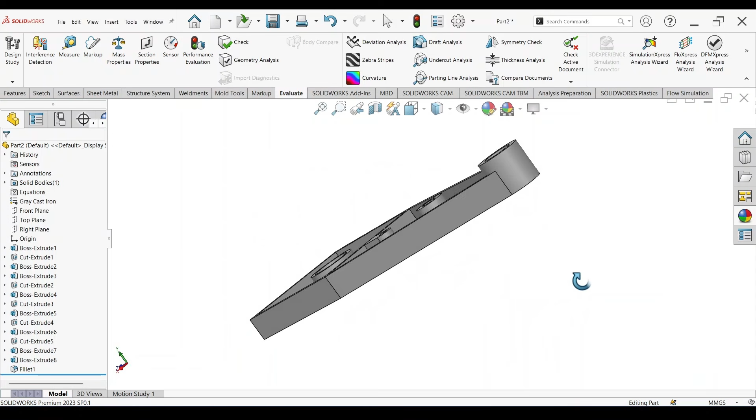In designing this part within SolidWorks, we're going to be using many SolidWorks features, namely the extrude boss base feature and extrude cut feature. But to create these ribs here, you have two options: you can either use the extrude boss base tool, following the sketches you create, or you could use the rib tool. This is left up to you.

Here we see the schematic drawing for exercise number 46. All dimensions are in millimeters. We have the top view, the section view, taken along this vertical line represented by the line of symmetry for the component, the y-axis. We also have the isometric view and a trimetric view, two different pictorial views so you can see all the necessary details.

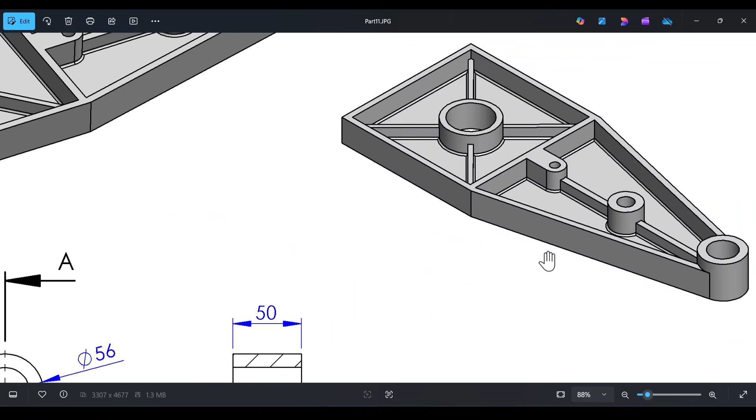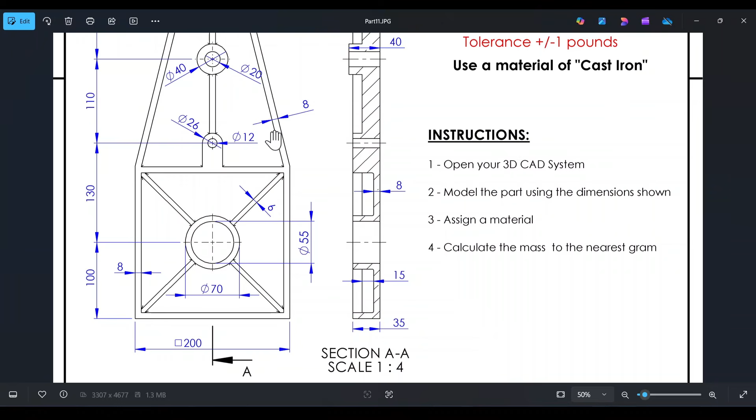If you look at the drawing here, we see a question that reads: what is the mass of this part in grams? We're instructed to use a material of cast iron, or gray cast iron. We have a number of instructions, pretty self-explanatory: you start by modeling the component according to the dimensions shown, assign the material, and then determine the mass of the component.

We have a note here at the bottom that says, unless stated, all fillets have a radius of 2 millimeters. Do we have a fillet here for this component? We do. We see the intersection, the edges between the wall here and the bottom surface, where we have a fillet.

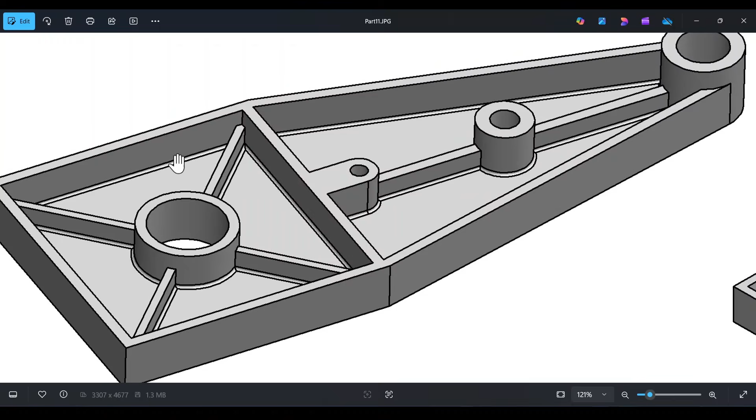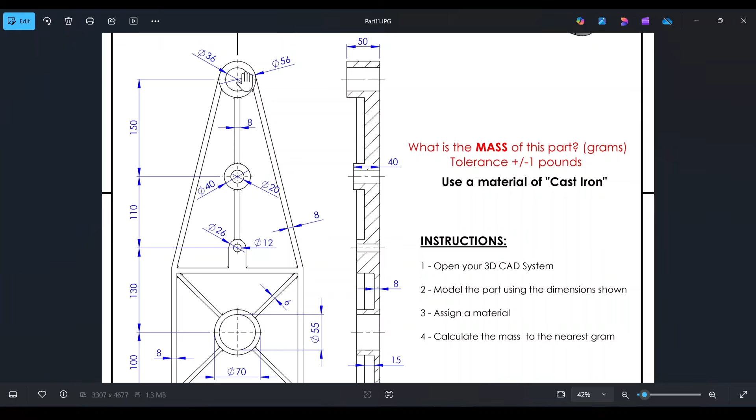Looking at the main features for this component, we see we have a base plate represented by a square region, in addition to a tapered upper arm. We have three bosses: the upper boss, the intermediate boss, and the lower boss, in addition to the diagonal ribs for the lower boss, and a central rib that runs along the center of the component, the line of symmetry. This rib connects the upper boss with the intermediate boss, in addition to this mounting region.

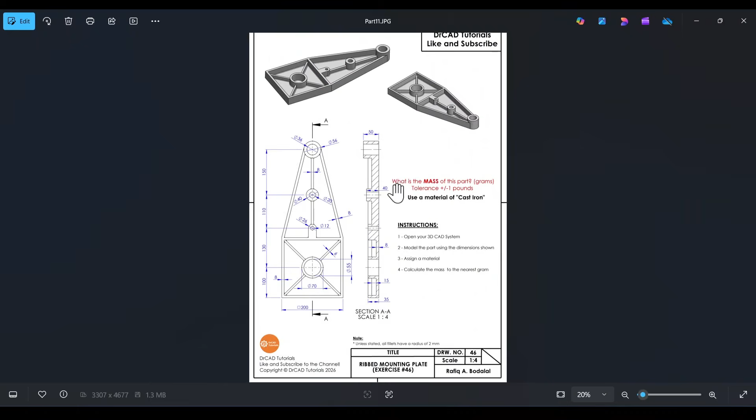Also, if we look closely here, we have a recess, an opening. So this is not a perfect solid, it's actually a pocket. If you're manufacturing this, you'll have to use a milling machine to create these pockets. That's basically all the necessary features for the component. It's a relatively simple practice problem within SolidWorks. With that aside, let's get started with exercise number 46.

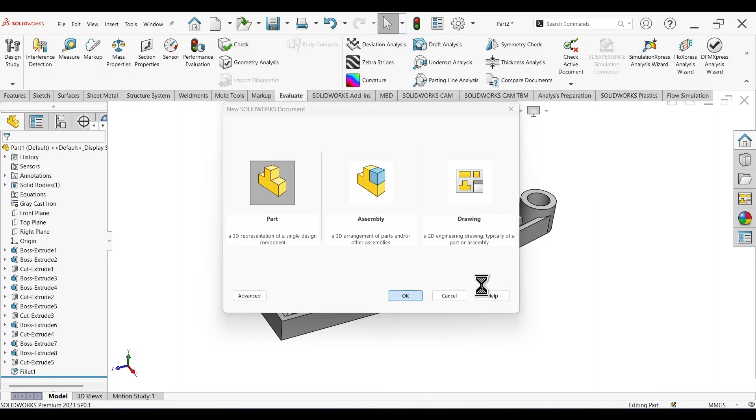Okay, so let's start by creating a new SolidWorks part. Let's set the background to plain white, and let's copy exercise number 46 into SolidWorks. Let's go ahead and make this smaller.

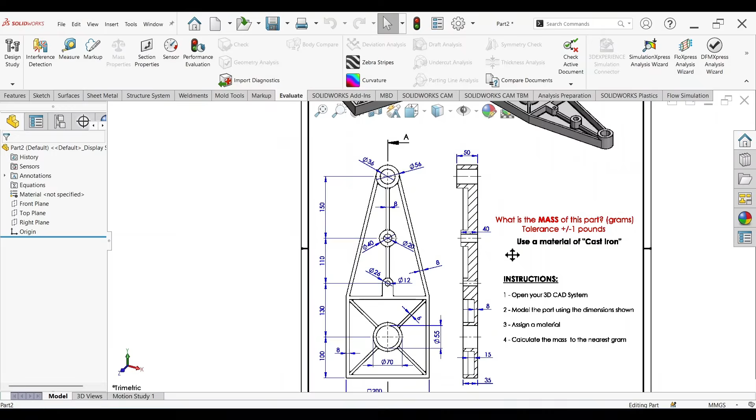As I said previously, we are going to start by creating the 2D sketch represented by the base plate for the component. So let's select the top plane, sketch, drag this to the side, and sketch out this square region. Activate the center rectangle tool, and from the origin, draw a rectangle. Select these two entities and set the relation as equal, and that will create a perfect square.

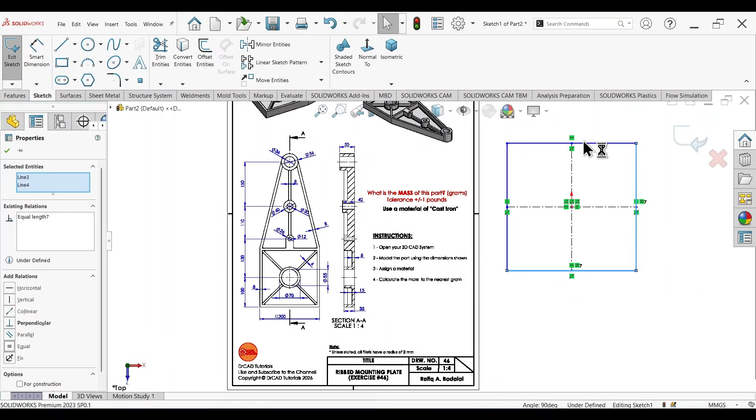Activate the Smart Dimension tool. From the figure we see that this square region has a dimension of 200 millimeters, and this square symbol here represents that the dimension of this side is equal to the dimension of this side - it's a perfect square. So this should be 200 millimeters.

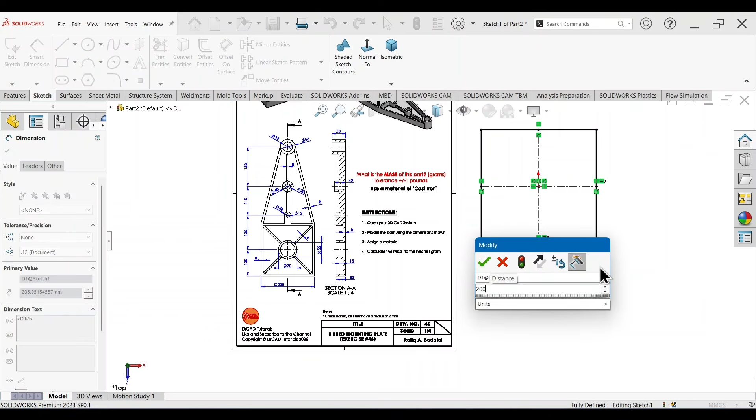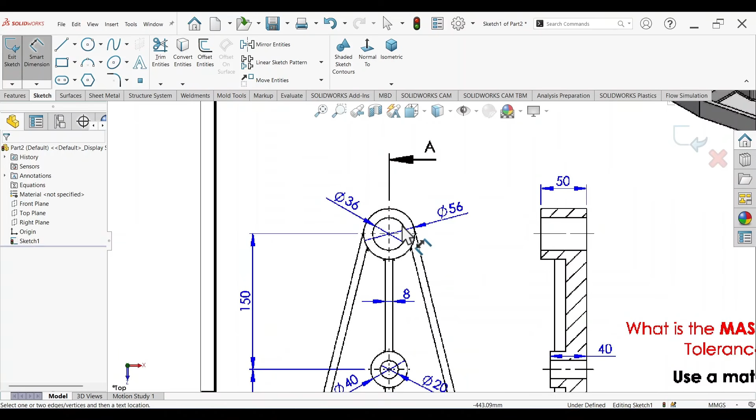Now we're going to sketch the upper arm here, the tapered upper arm for the component. Let's activate the circle tool, and from this point, draw the circle. Activate the Smart Dimension tool, and we can see that the diameter of this larger circular region is 56 millimeters, so this is 56 millimeters.

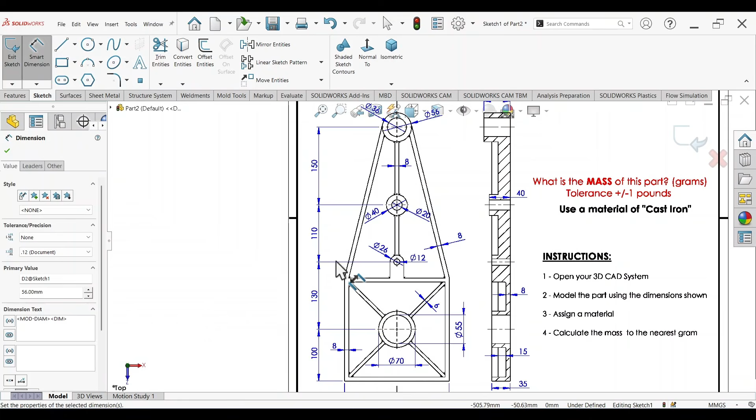The distance between the center of this circle and the center or origin of the component is 150 plus 110 plus 130, according to the image, which gives us an overall distance of 390 millimeters. So the distance from this point all the way to the origin should be 390 millimeters.

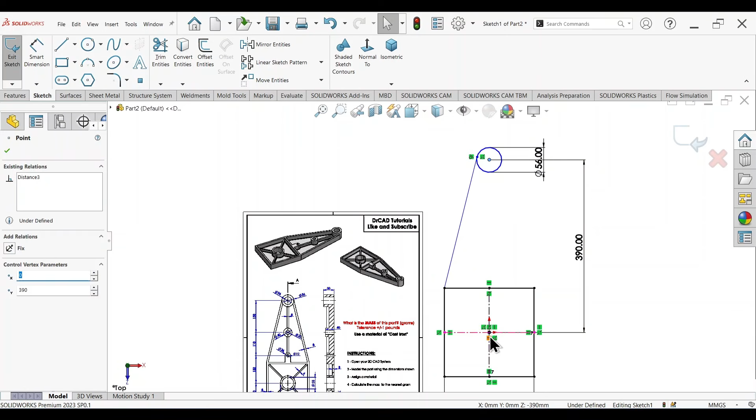Now activate the line tool, and from this circle all the way to this edge, draw a line. Let's set the relation between the center of the circle and the origin as vertical. Again, activate the line tool and connect this circle all the way to this point. Now we have the basic 2D profile for the component. Let's activate the trim tool and delete any extra entities that we don't need.

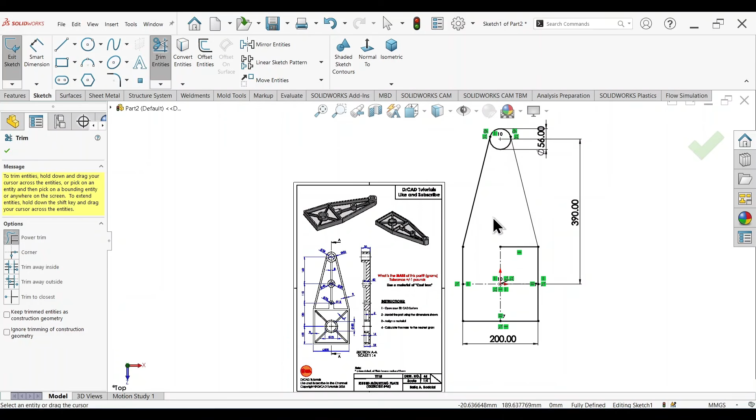Don't worry about the fact that the entities turned blue here and that the sketch is underdefined. We've fully defined all the dimensions here, so we can proceed to the next step, which is to extrude the 2D sketch.

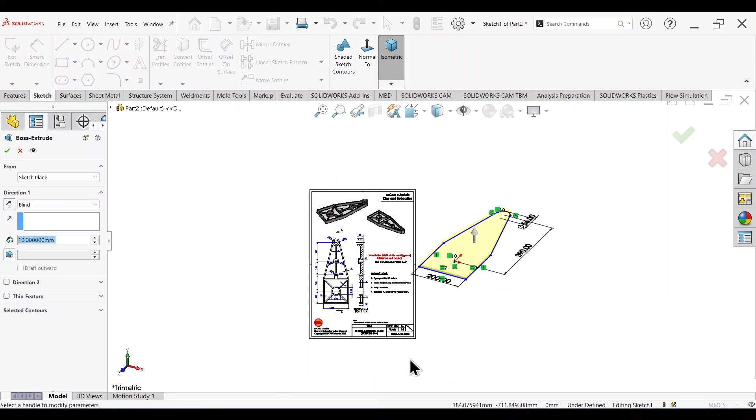Press S on your keyboard, extrude boss base. Looking closely at the section view, from this point all the way to the bottom right here, the thickness should be 35 millimeters. So go ahead and assign a thickness of 35 millimeters, then click OK.

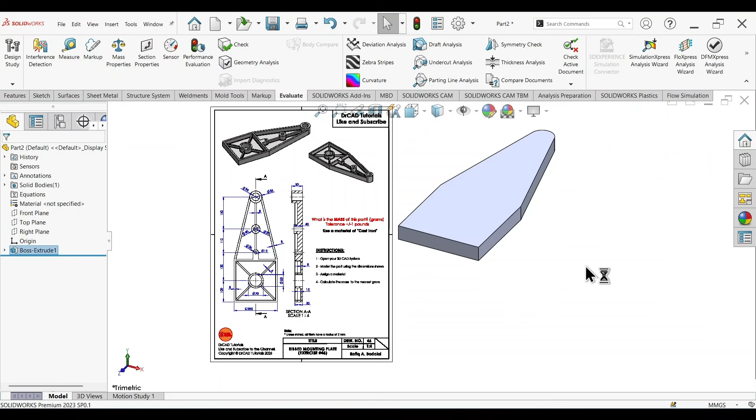Now we're going to work on creating this lower boss here. Before that, we need to create the recess, the opening, the pocket opening for the component. So let's select this face, sketch, and select convert entities.

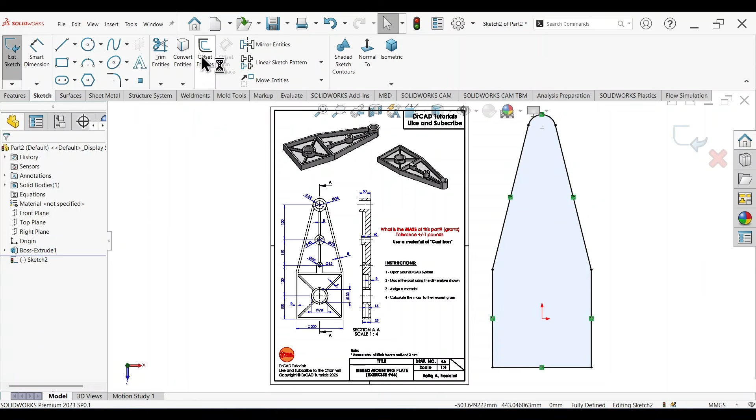Then select offset entities and set the offset distance. Looking closely here, we have a wall thickness of 8 millimeters, so this needs to be 8 millimeters. Select the sketch, reverse direction, and that's pretty much it.

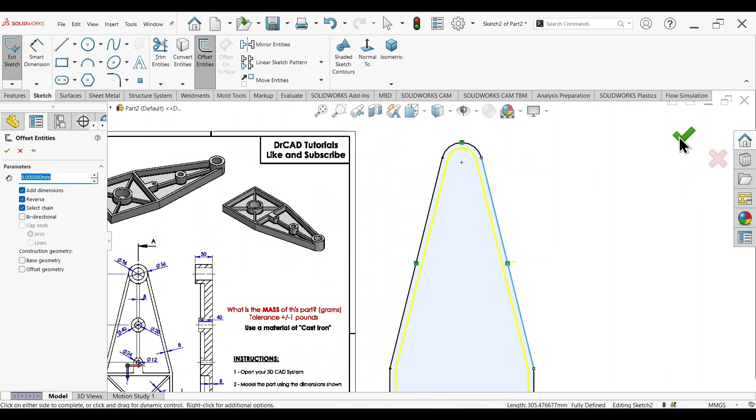Select OK, then trim entities. Let's delete this top arc here, just draw a circle from this point all the way to right here. Trim entities and delete any extra entities in the middle, leaving behind the 2D sketch of the wall.

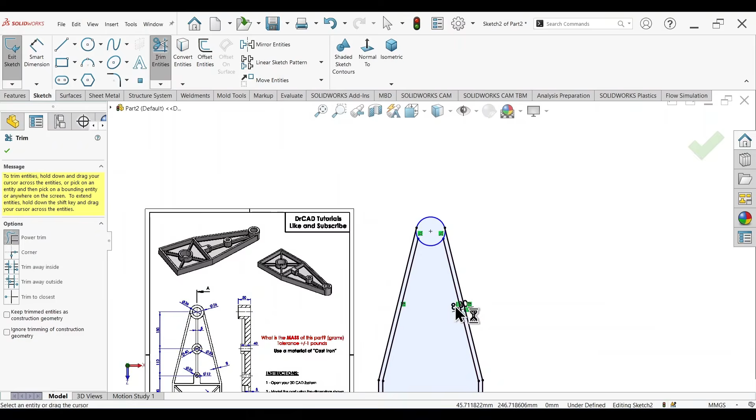Now press the S key, extrude cut. Select this 2D region, and we're going to cut this 2D sketch to a depth of, if we look closely here, it should be right here.

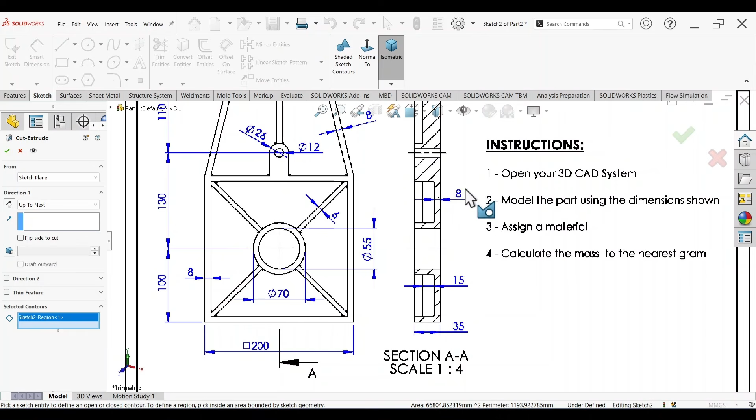The thickness of the base right here is 8 millimeters, while the overall thickness is 35, so it should be 35 minus 8. Right click on your mouse, set the end position as blind, so it's 35 minus 8, then select OK. That creates the opening, the pocket for the component.

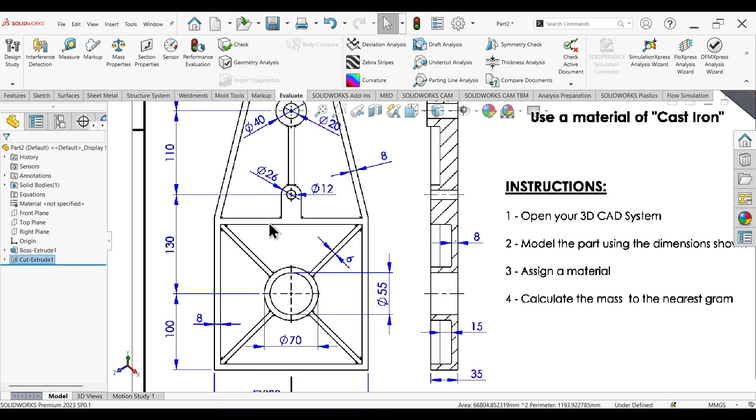Now let's go ahead and close off this square region right here. Select this face, sketch, activate the line tool, and starting from this point all the way to the other point, let's draw a line.

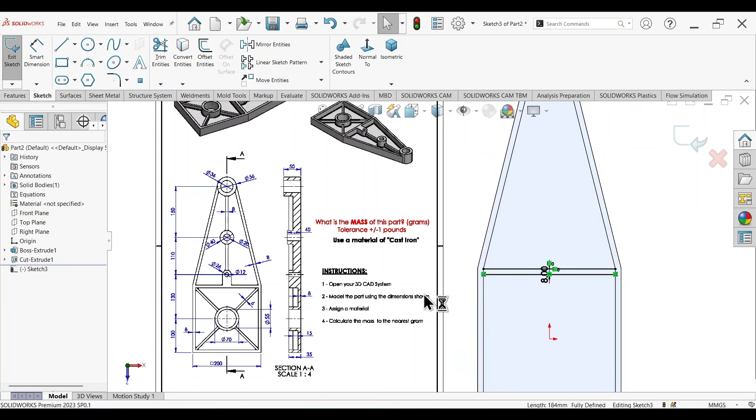Select offset entities, and looking closely here, we need to offset this line to a distance of 8 millimeters, then select OK. So line tool again, to close off a sketch.

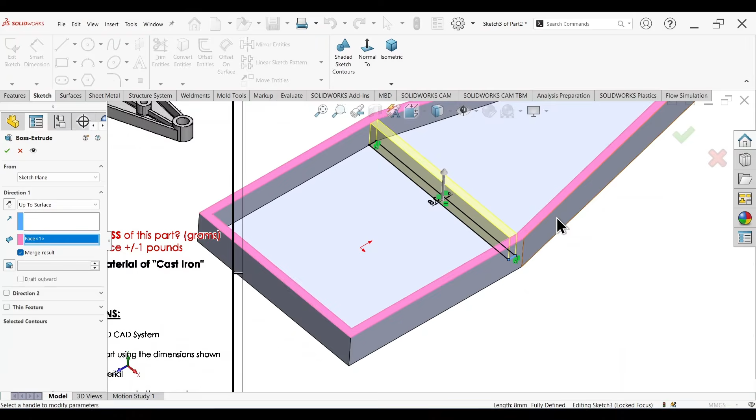Press the S key, extrude boss base, set the end condition as up to surface, and select this surface right here so that the walls are of the same height, then select OK. Slowly the component is starting to take form.

Now let's work on creating this lower boss here at the bottom. Go ahead and select this face, sketch. Let's draw a circle starting from the origin, then activate the Smart Dimension tool.

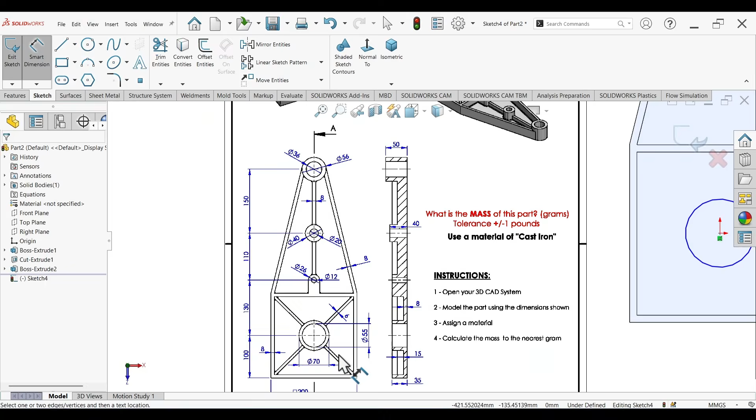From the figure, we see that the diameter of this larger circular region should be 70 millimeters. So the diameter of this circle should be 70 millimeters. Press the S key, extrude boss base.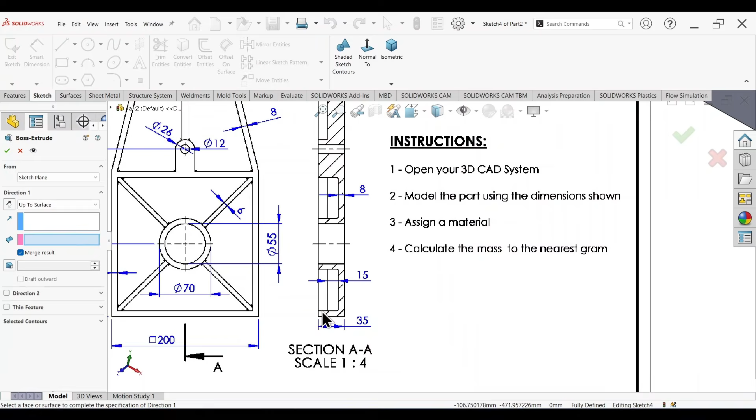We can see here that the boss should be extruded all the way to a height of 35 millimeters. Basically, the surface right here corresponds to the surface of the wall for the component, so let's select up to surface and select this surface right here, then click OK.

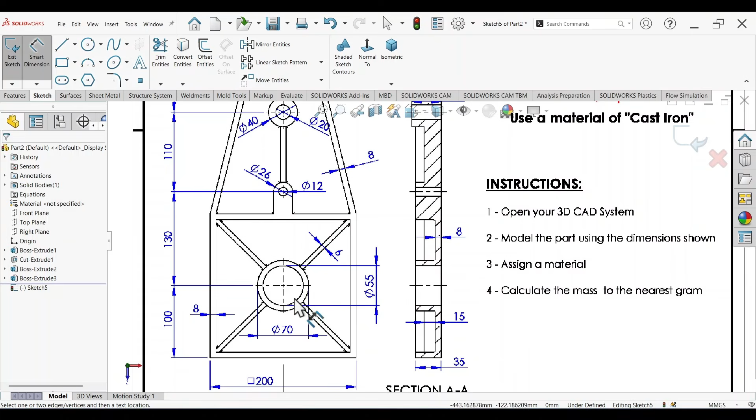Select this surface, sketch. We're going to create the hole now. Activate the circle tool, from the origin draw a circle, activate the Smart Dimension tool, and we see that the hole should have a diameter of 55 millimeters. So the diameter of this circle should be 55 millimeters.

Now press the S key, extrude cut, right click on your mouse, up to next, and click OK. That creates the lower boss for the component.

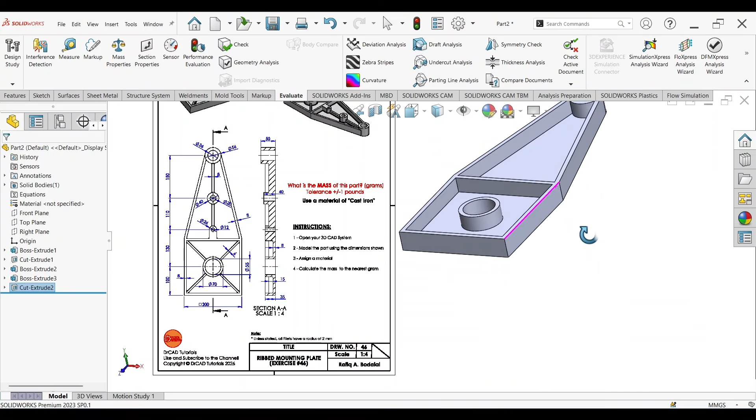If you look closely here, we see that the upper boss at the top has a cylinder protruding above the base thickness of the component, and there's a hole running along the circle right here, corresponding to the center of this point.

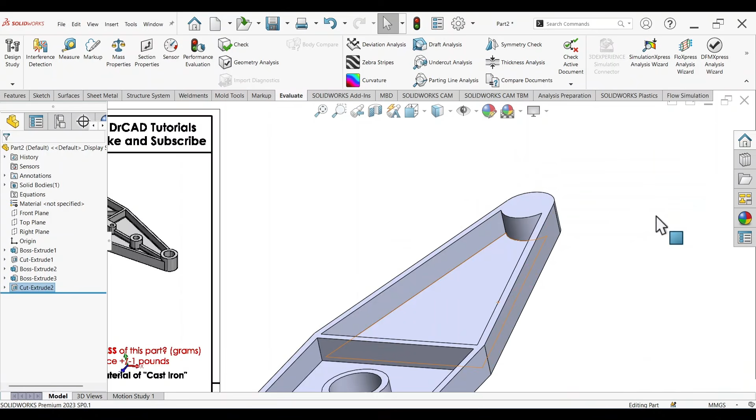So what are we going to do? We're going to select this face, sketch, activate the circle tool, and starting from this point right here, let's draw a circle all the way to the periphery.

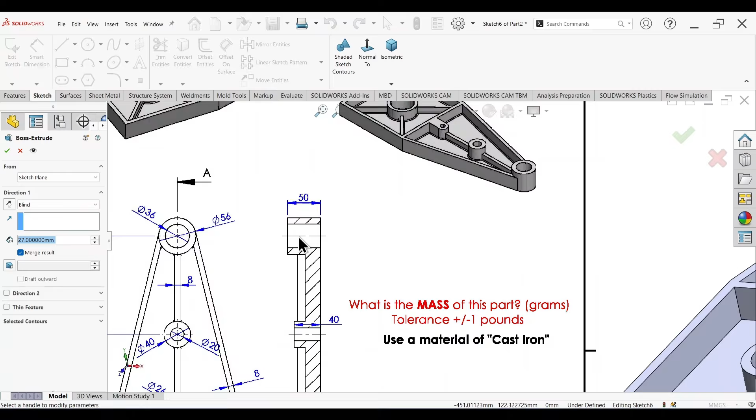Press the S key, extrude boss base, and extrude this 2D sketch. Look closely here, the overall height for the upper boss should be 50 millimeters, while we have a pre-existing base thickness of 35. So it should be 50 minus 35, which gives us a thickness of 15. Select OK.

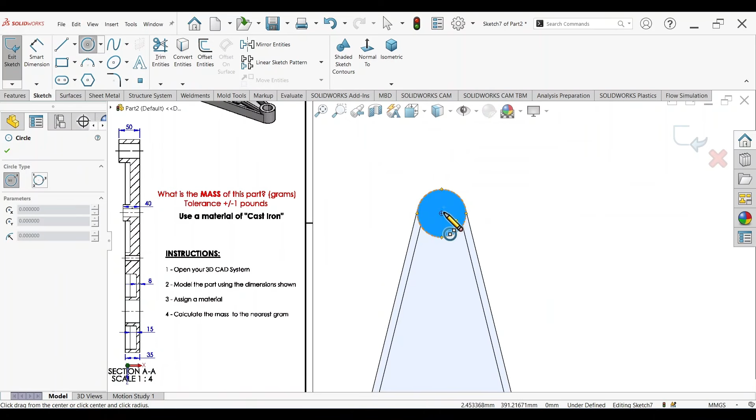Now select this surface, sketch, we're going to create the hole, activate the circle tool, and starting from this point we are going to draw a circle. Activate the Smart Dimension tool, and if you look closely here, the hole has a diameter of 36 millimeters. So this is 36 millimeters.

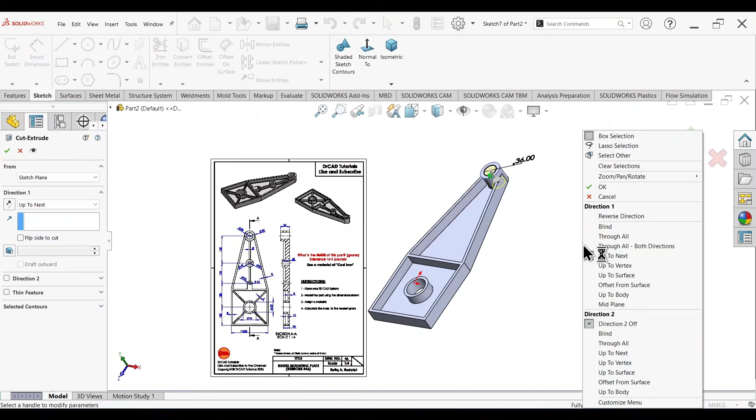Once again, press the S key, extrude cut, set the end condition as up to next, already set to that, then click OK. That creates the lower and upper boss for the component. Now we can see very clearly that we have an intermediate boss.

We're going to create that right now, so select this face, sketch, activate the circle tool, and starting from any point right here, let's draw a circle. Set the relation between the center of this circle and the origin as vertical. Activate the Smart Dimension tool, and we can see the diameter for the intermediate boss should be 40 millimeters.

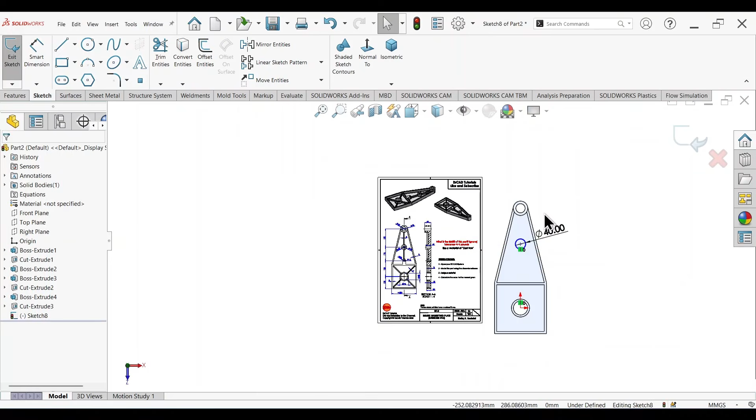The distance between the center of this circle and the intermediate boss should be 150 millimeters. Activate the Smart Dimension tool. The distance between this circle and this circle should be 150 millimeters.

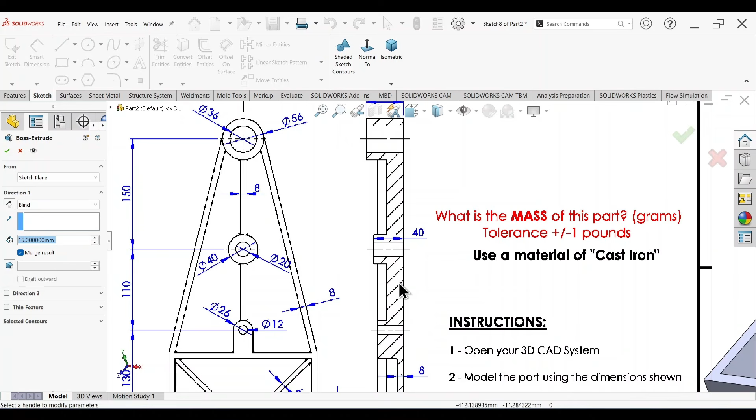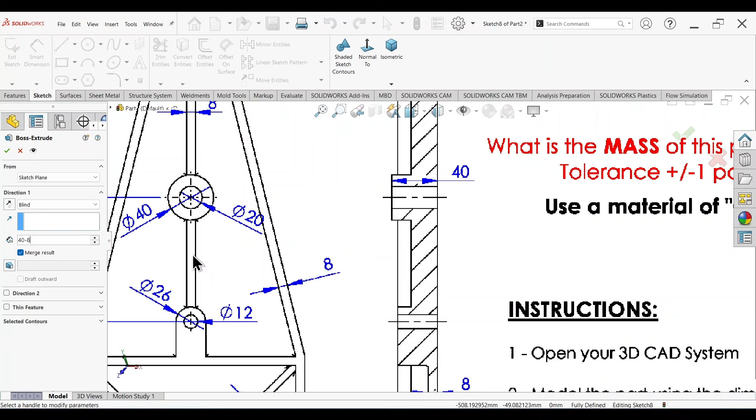Press the S key, extrude boss base, and we can see here very clearly that the overall height is 40, right? But we need to take into consideration that we have a base thickness right here, the base plate is 8 millimeters. So it's 40 minus 8. Also please notice that this thickness corresponds to the thickness of the rib here, the reinforced rib. So then click OK.

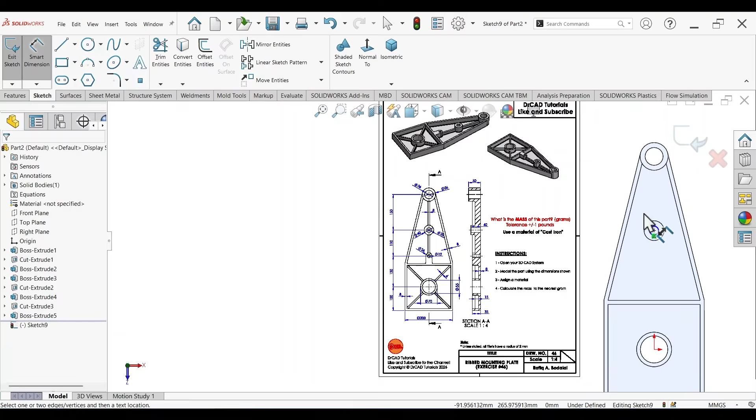Now click this surface, sketch, activate the circle tool. From this point let's draw a circle, activate the Smart Dimension tool, and you can see the diameter of the hole intermediate boss is 20 millimeters. So this should be 20 millimeters.

Again press the S key, extrude cut. We're using the extrude cut tool a lot in this video, I'm very sorry. Set the condition as up to next, then click OK. So that creates the upper, lower, and intermediate boss for the component.

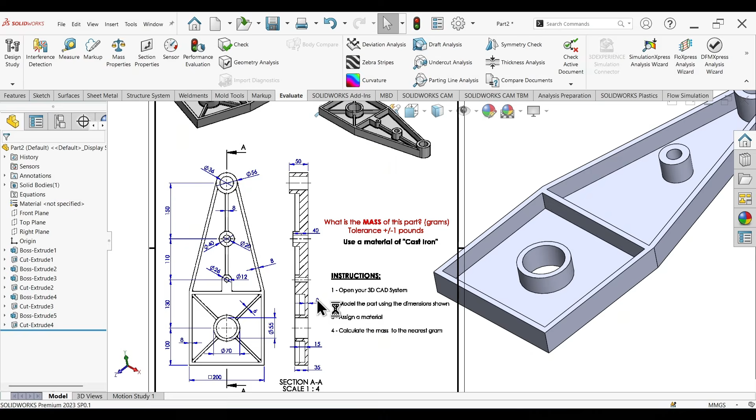Now what's left is this protruding region, the mounting region right here. Look at the isometric view. We see that we're going to have to create a 2D sketch and then extrude it all the way to the surface right here, the reinforced walls. So let's select this surface, sketch, activate the line tool.

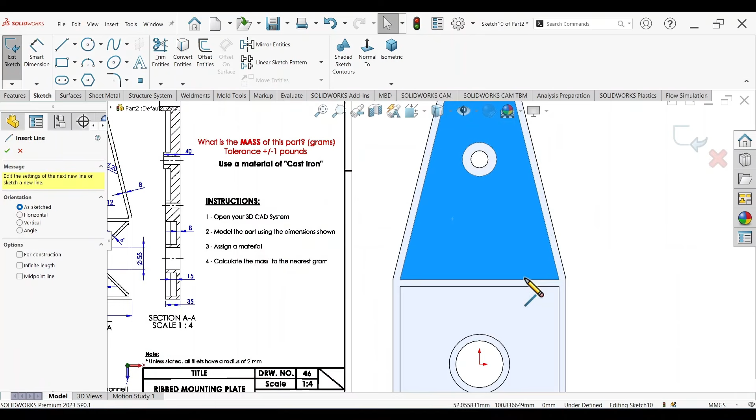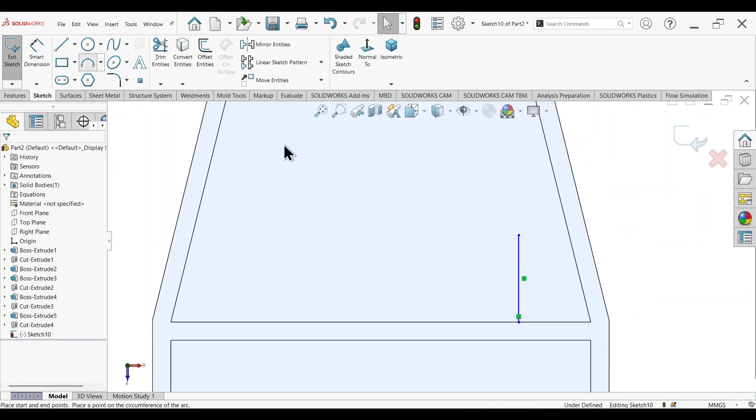At any point right here, let's draw the basic 2D profile for the 3D solid, okay? This point, let's go all the way back here, convert this to an arc, control Z, activate the line tool right here. Just one second. So you select 3-point arc. Line tool, and close off the sketch right here.

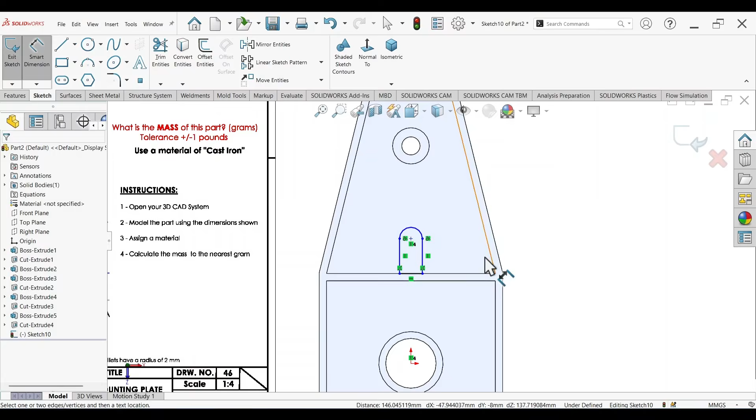Set the relation between the center of this circle and the origin as vertical. You can press V on your keyboard. Activate the Smart Dimension tool, and we can see that the diameter of this circular region, outer circular region, should be 26 millimeters. So the radius should be 26 divided by 2, gives us 13. And the distance between the center of this circle and the center of this upper circle should be 130 millimeters.

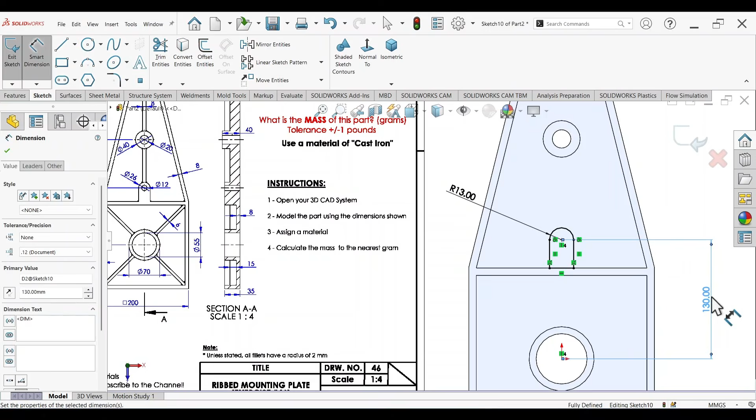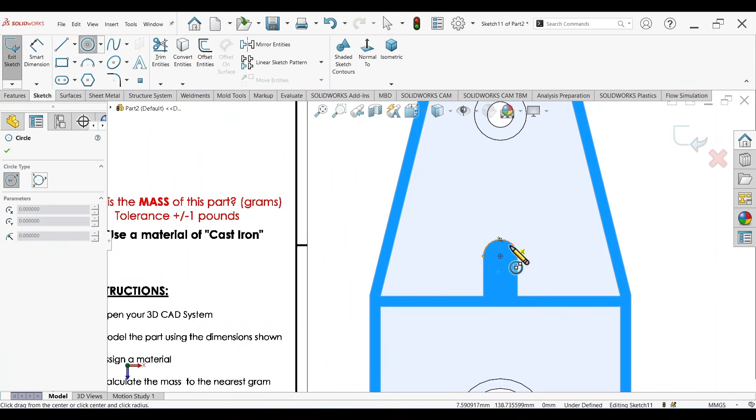Now the sketch is fully defined. Press the S key, extrude boss base, set the end condition as up to surface, and select this surface. Click OK. We're going to create the hole, select this surface, sketch, activate the circle tool, and draw a circle. Smart dimension, and we see the hole here has a diameter of 12 millimeters. S key, extrude cut, right click on your mouse, up to next, and fit.

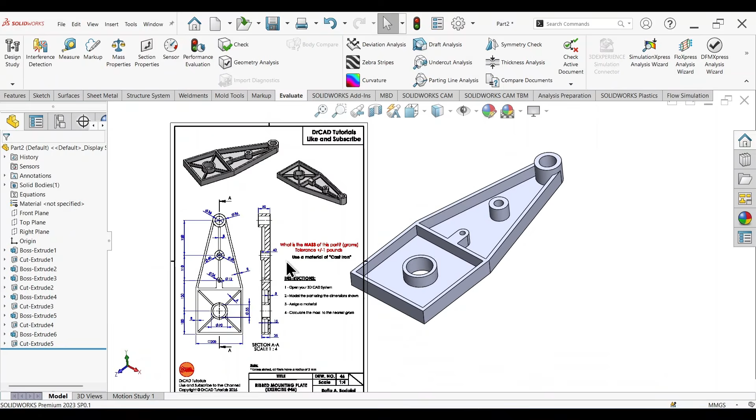Now what's left with the component is very simply we have to create the reinforced ribs. We have this diagonal or radial rib here, in addition to this central rib that runs along the line of symmetry for the component. You can start with whatever you want, so I'm going to start with this central rib right here.

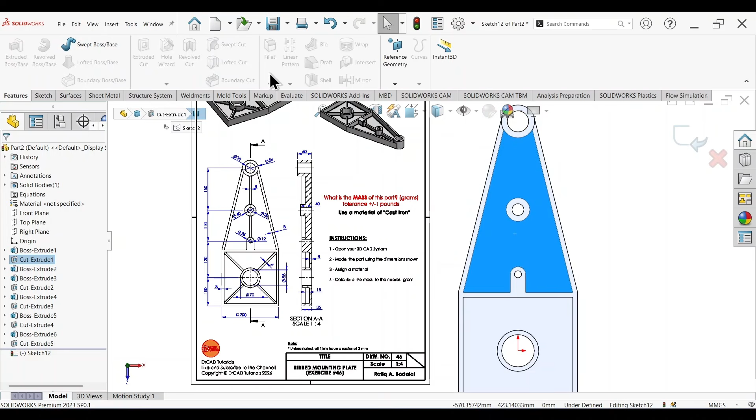Select this face, sketch, and as full disclosure I need to mention that you can create ribs either using the standard extrude boss base tool, or the rib tool. I'm going to use the extrude boss base tool because it's more intuitive and easier for me to use. So let's draw a circle, draw a line from this point all the way to this point right here, draw another line.

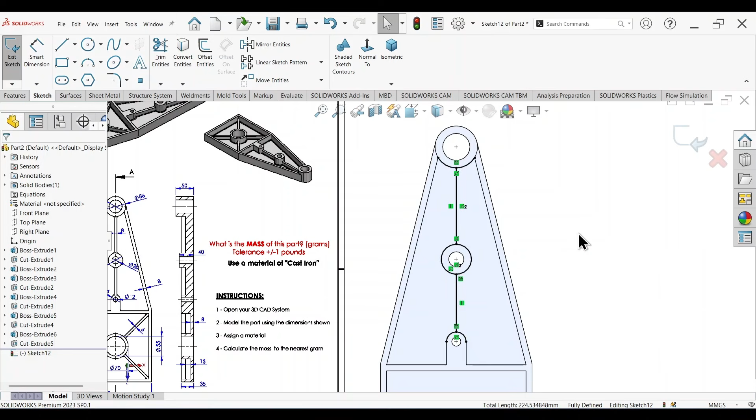Select this circle and this arc, as well as this region right here, and then select convert entities. We're going to use the offset entities tool.

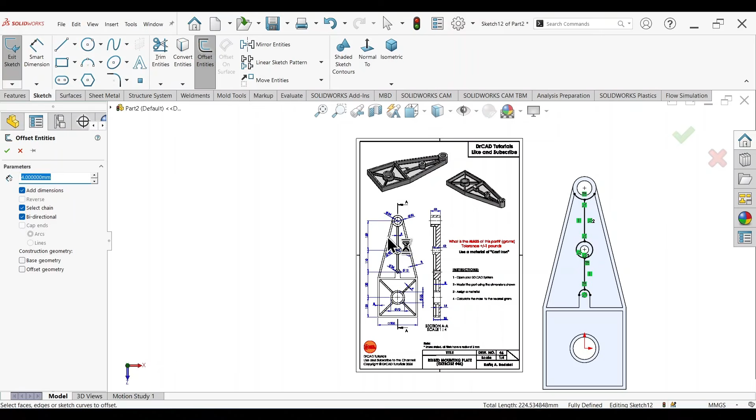If we look at the schematic diagram, we see that we have a rib with a thickness of 8 millimeters. We're going to set the condition as bidirectional and set the offset distance as 4 millimeters, so it offsets the line 4 millimeters on either side of the component. Select this line and this line right here, then click OK.

Now select extend entities, and we're going to extend these offset lines all the way to their circular profiles right here.

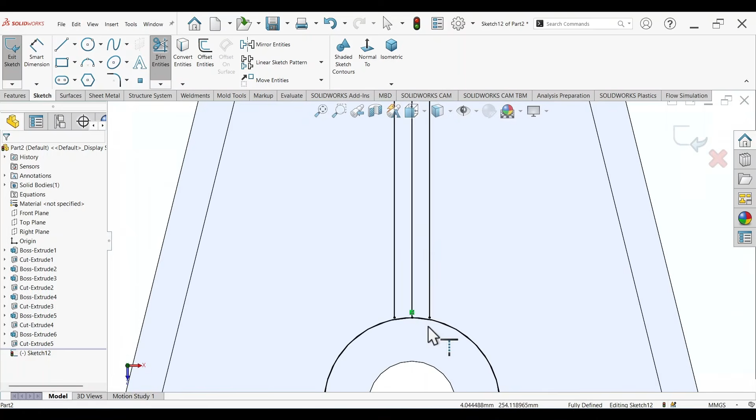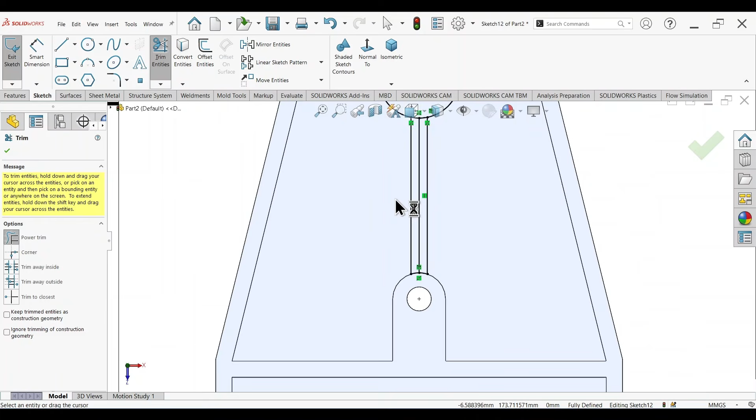This method is more tedious, but it's more intuitive, at least for beginners watching right now. So now we need to activate the trim tool and delete any extra entities we don't need, leaving behind the 2D sketch for the rib right here.

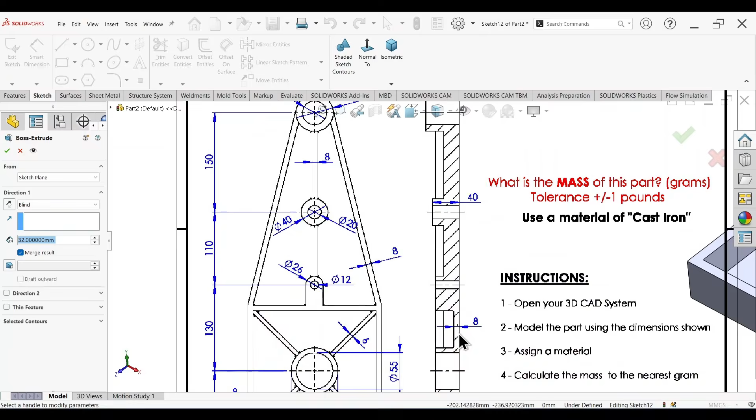Click OK. Press the S key, extrude boss base, and set the end condition as blind. Looking closely, the rib for the component should have an extrusion height of 8 millimeters starting from the top surface of the base, so let's assign an extrusion thickness of 8 millimeters.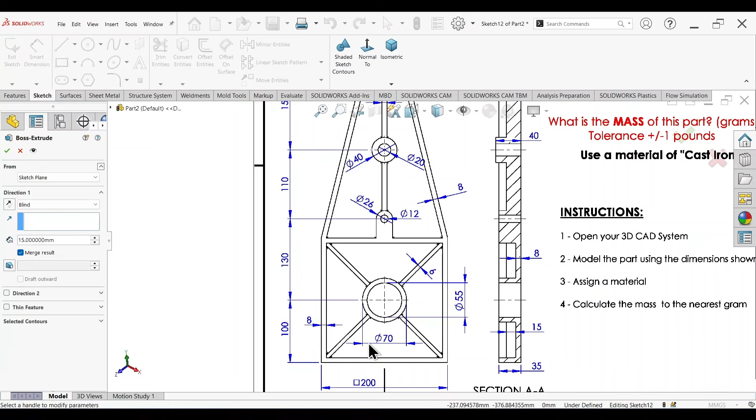This is the case for the diagonal ribs in the square region, or the central rib that runs along the central line of the component. Then click OK.

That creates the rib for the upper part of the component. Now let's select this face and sketch.

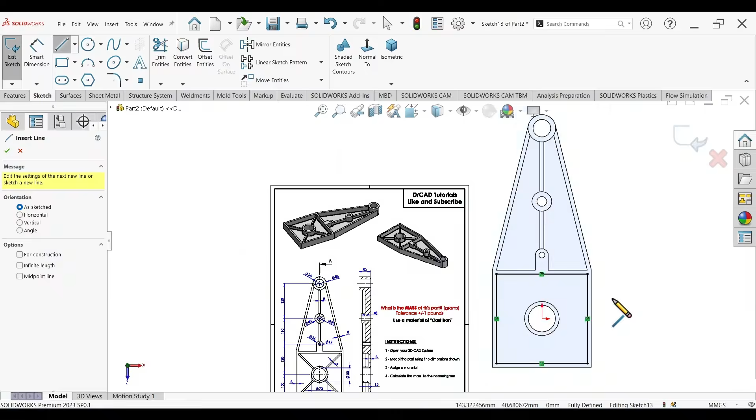We're going to work on the diagonal ribs, convert entities. Let's activate the line tool, and starting from this corner all the way to the opposite corner, draw a line, basically a diagonal.

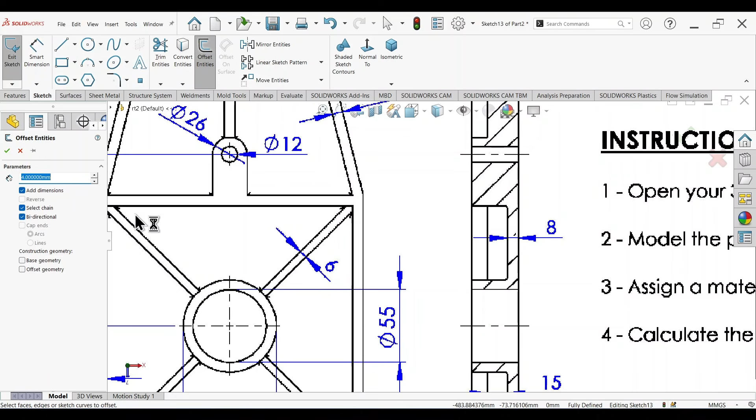Now go to offset entities. Looking closely, the thickness of the ribs here should be 6 millimeters, and since we set it to bidirectional, half of it should be 3 millimeters. Select this line and this line, then click OK.

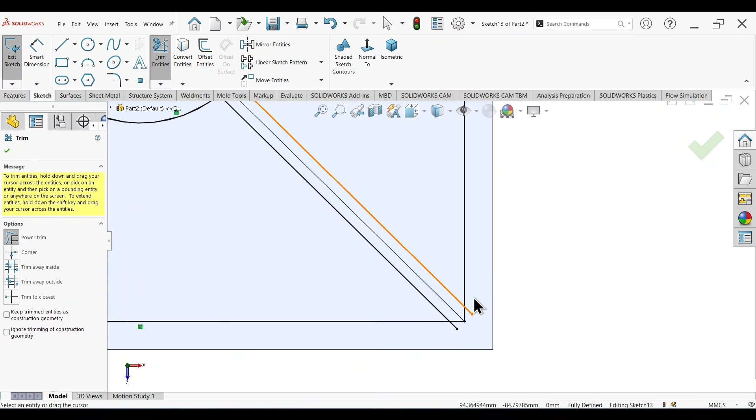Select this outer circle, convert entities. Now we just need to trim any extra entities that we don't need. Let's carefully delete any extra entities, leaving behind the 2D sketch we need for these diagonal ribs.

It's a tedious process, but you can have fun.

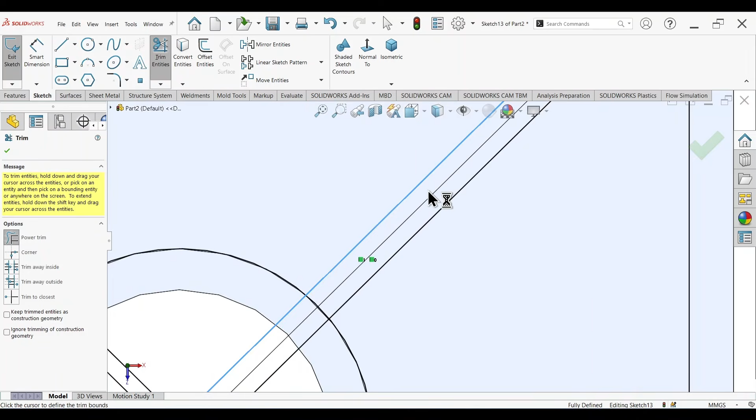Let's go ahead and delete these.

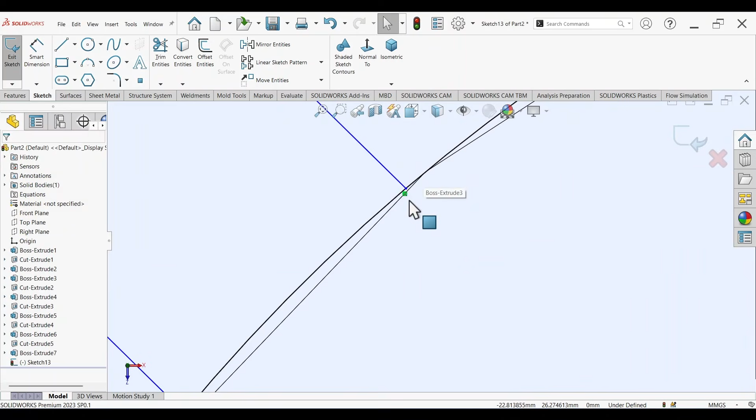Look closely here - we need to extend. Actually, we don't need to extend. Activate the trim entities tool and delete these lines right here. Now we have the basic 2D profile for these diagonal ribs.

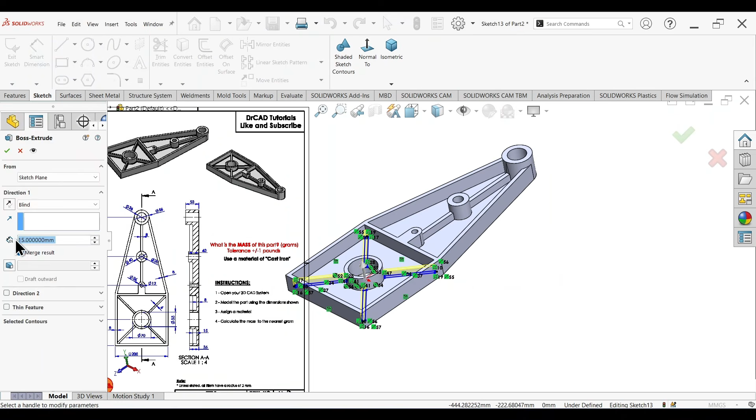Press the S key, extrude boss base, and extrude this to a thickness of 15 millimeters, then click. Now that creates the diagonal ribs for the component.

Are we done yet? No, we still have one more thing to do. If you look closely here, we see that we have fillets for certain edges of the components, namely the inner edges.

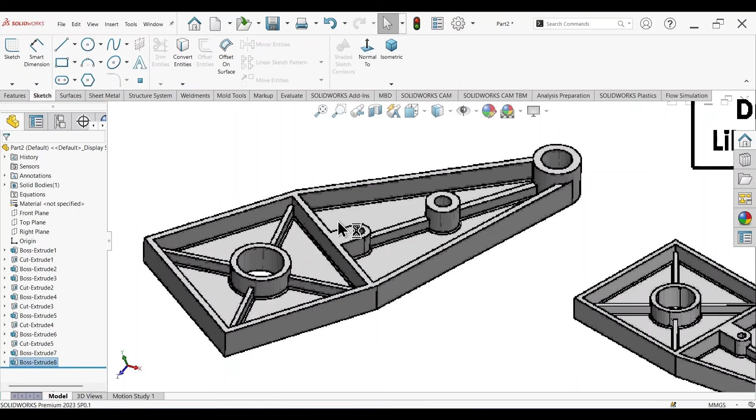So we're going to go to Features, Fillet, and set the fillet radius to 2 millimeters. This is according to the note at the bottom: unless stated, all fillets have a radius of 2 millimeters. So assign a fillet radius of 2 millimeters.

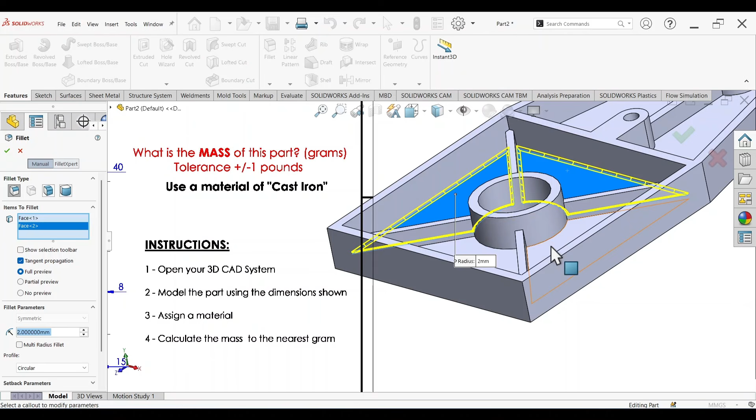Click on the surfaces that you want to fillet. You can see automatically all the necessary edges were selected when you select the surface. Then click OK.

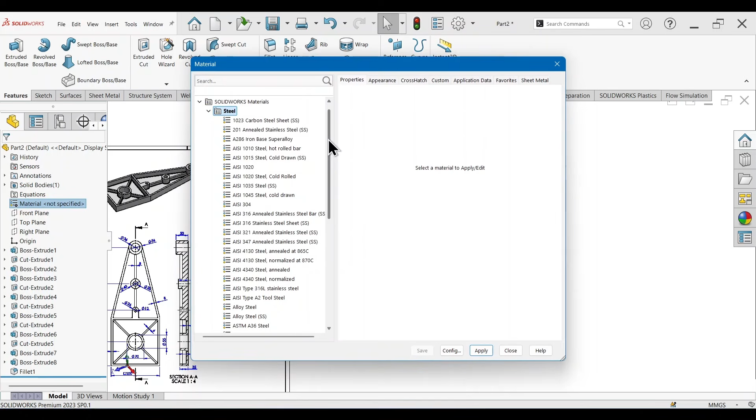Now this ends the modeling process, but we need to assign a material. Right click on Material, Edit Material. The material we're going to use is cast iron, so go down here, select iron, then select gray cast iron.

Apply, close. I don't like the color, so you can change the appearance. Let's select this color and click OK.

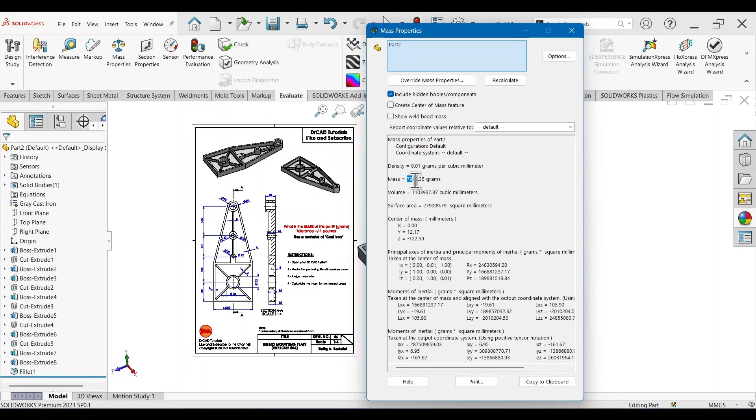Now I think we're ready to determine the mass of the part. Go to Evaluate, Mass Properties, and we can see here that we have a final answer of 7,948.35 grams. Basically, if you want to round things up, the component weighs about 8 kilograms.

Delete the image. Set the view to perspective. That concludes exercise number 46.